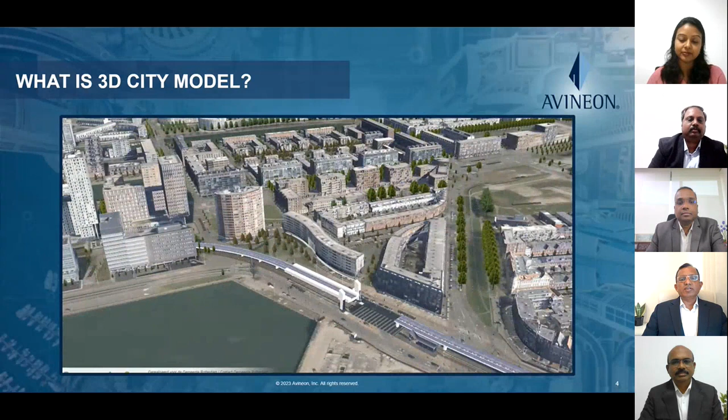Hello everyone, Preetha. A 3D city model is a detailed digital representation of the city's infrastructure. As it's a replica of the city, it's also called a digital twin of the city. Today, over half of the world population is living in urban areas, and it's expected to go to about 70% in the next 30 years.

In such a scenario, it's very important for the urban development authorities to compare the conditions within the city over time, simulate possible future scenarios so that they can plan for sustainable development. A 3D city model comes handy in such situations.

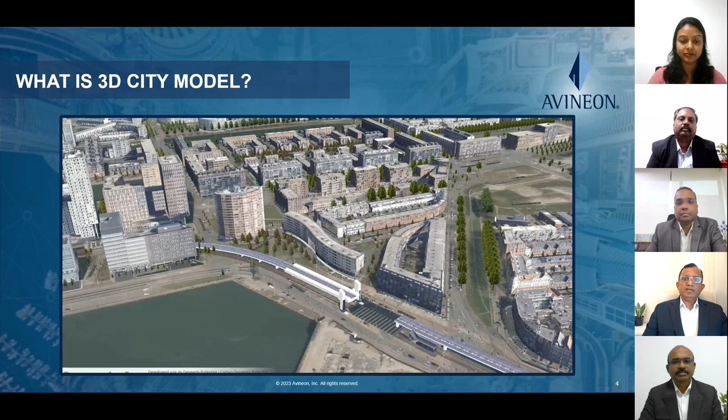Some of the areas in which a 3D city model can be helpful are urban planning, flood analysis and risk mitigation, energy consumption calculations, noise propagation analysis, visibility analysis, solar potential analysis, 5G network analysis, etc. A 3D city model also serves as the basic input for the metaverse, which is the technology of the future.

Thank you Pramod, for elaborating on various applications of 3D city modeling. Now I would like to welcome Srinivasulu Banda, AVP 3D Data Services GIS. We would like to know from you, what are the data sources needed to develop 3D city models?

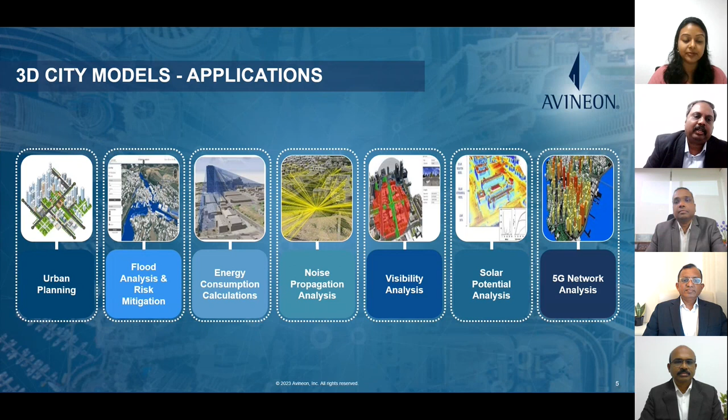Thank you Preetha. 3D city models are created by integrating multiple data sources. These data sources, some could be existing and some could be new. Even one can use hybrid data sources to develop the 3D city models based on the accuracy requirements and the cost.

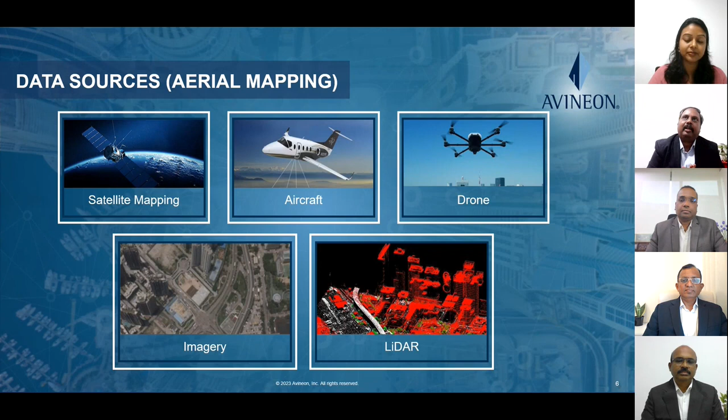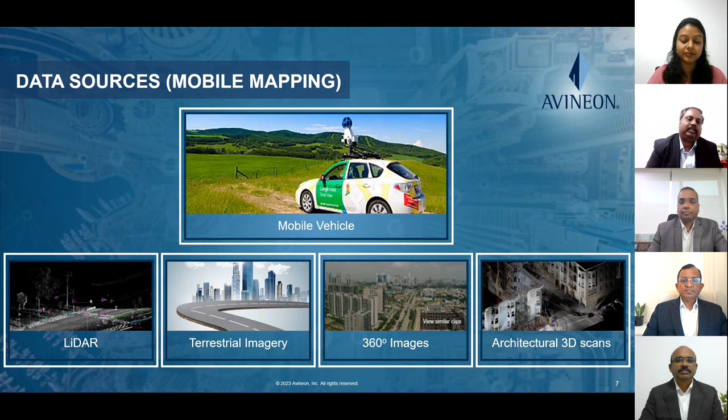The various data sources include aerial data, that is from satellite, aircraft, drone imagery, and LiDAR point cloud. The other is mobile data source, that's like mobile LiDAR data, terrestrial photos, 360 images, and architectural 3D scans. There is also existing data source like as-built drawings, planimetric data that includes buildings, roads, bridges, flyovers, etc.

Thank you Srinivasulu, for shedding some light on multiple data sources. Now I would like to welcome Govardhan Jutla, GM 3D Data Services, who has been a critical part of 3D city model implementations. Hi Govardhan. Can you tell us what are the various contents of 3D city models and various level of details?

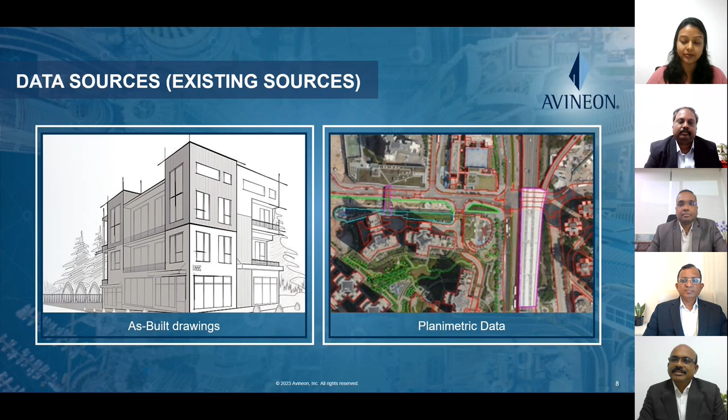Sure, Preetha. 3D city models are digital models of urban areas that represent the terrain surfaces, buildings, bridges, vegetation, infrastructure elements, landscape features, as well as road assets like signages, street lights, city furniture, etc. Coming to the level of detail, or as we commonly call it LOD, it refers to the level of complexity in a 3D generated model and is primarily used in real-time rendering to visualize or analyze using interactive tools.

It varies LOD 0 to LOD 4. Essentially, the higher the content, the higher the LOD. LOD 0 is the building footprint and LOD 1 is the box model. LOD 2 adds realistic roofs, and LOD 3 adds exterior details like doors, windows, stairs, and balconies, while LOD 4 adds interior details of the model.

The level of detail to which the model has to be prepared depends on the application. Different applications need different kinds of LODs. For example, for visibility analysis we use LOD 1 models, whereas for solar roof area calculation we use LOD 2 models only. For energy consumption calculation we use LOD 3 models, and for logistic planning we use LOD 4 models.

Thank you, Govardhan. It is quite interesting to know the role of LOD for various applications. Now, I would like to ask Srinivasulu, what are the various kinds of 3D city formats required, and why?

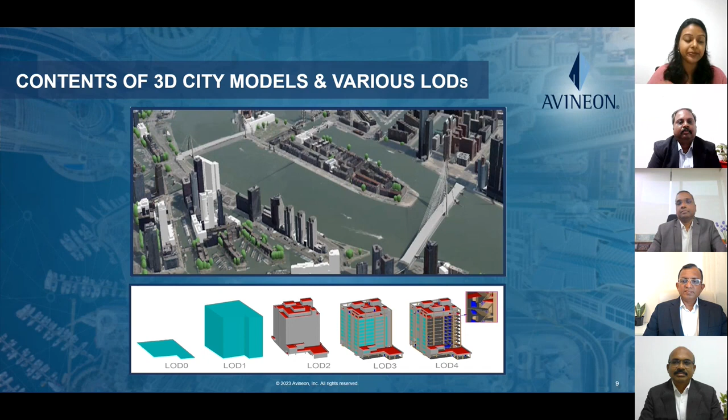Thanks, Preetha, for asking me this question. Basically, there are three types of 3D city formats: open source, other 3D formats, and commercial database formats. Open source data formats, which include CityGML and CityJSON, are important formats that comply with OGC standards, enabling spatial intelligence, attribute information, along with real photo textures. This ensures data interoperability with most other formats for various applications.

3ds Max, OBJ, FBX, C4D, and Collada are some of the important 3D formats required by various gaming engine software like Unreal and Unity for visualization and simulation. There are also other commercial database formats like Esri GDB, Oracle, and Postgres.

Thank you, Srinivasulu, for giving us an overview of various data formats of a 3D city model. Now, we would like to understand from Pramod how Avineon is supporting global clients on 3D city models.

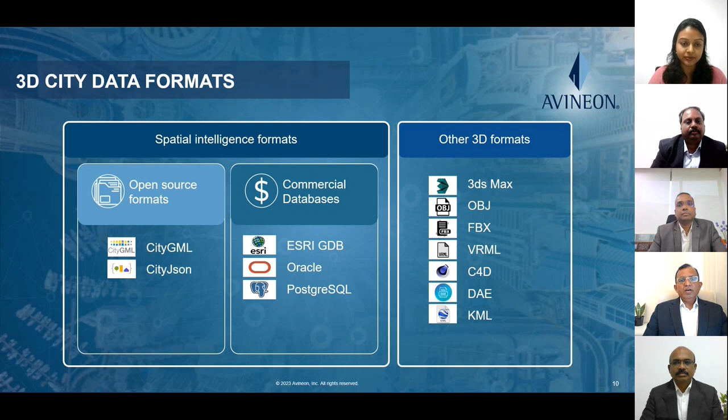Well, Preeta, Avineon has developed 3D city models for various clients across the globe. Some of the cities for which we have done that include Brussels, Groningen, Roeselare, Rotterdam, Ajman, and Hong Kong. Avineon, with its rich experience in this segment, can advise clients and accordingly develop the models depending on their budget, the availability of input data sources, and the applications for which it's going to be useful.

Apart from developing digital twins for the cities, Avineon also helps clients publish these models on the web, either on open source or on the Esri platform, depending on the client's needs and the use cases they're going to use it for.

Thank you, Pramod, for taking us through Avineon's expertise in 3D city modeling applications and experience in catering to global clients. As we conclude this session, I would request Raghu to add a few last words.

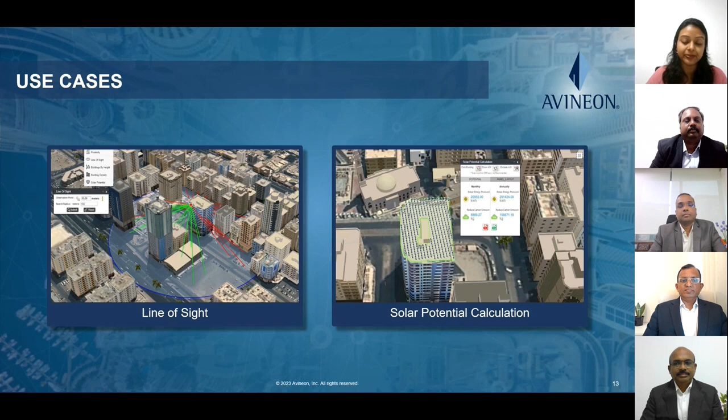Sure, Preeta. I would like to summarize that Avineon not only builds your 3D city models, we are also your one-stop solution provider to get you up and running with the model. We will ensure that your available data sources are utilized for the specific use cases you plan to address, thus managing your data input costs perfectly for the task at hand.

We will also help you design and set up the IT environment. This will allow you to use your model for its intended purposes with high performance, availability, and scalability. Our rigorous project management approach will ensure that we work in an agile, collaborative, and transparent manner. Quality is never compromised, and providing a good ROI will be our highest priority.

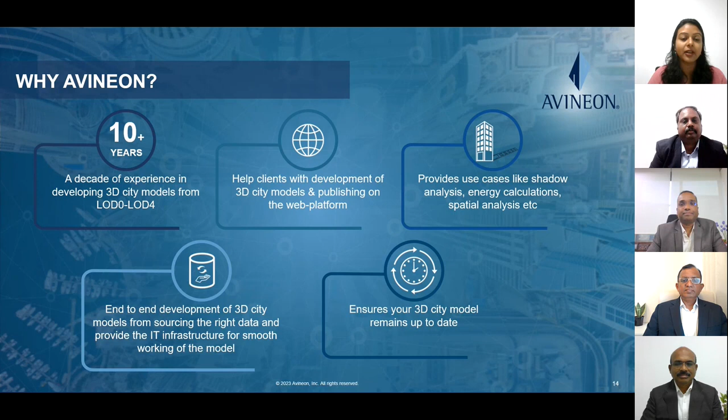Thank you, Raghu. As you can see, Avineon has well-established processes and solutions and highly experienced domain experts present in multiple locations to serve our global clients.